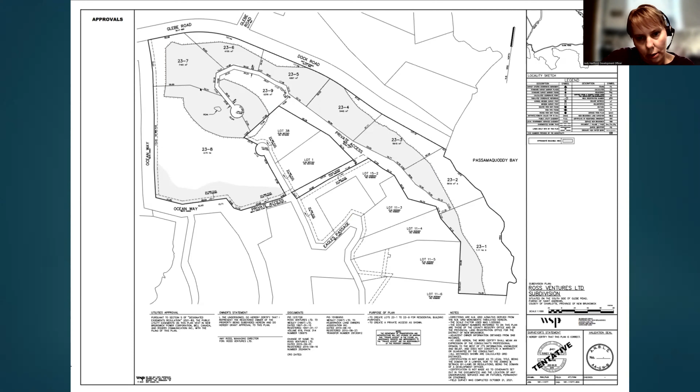The summary of the application is creation of a Class 1 private access for the development of land. This is the subdivision plan here. You'll see Ocean Way comes off of Glebe Road, and this would be one of the lots they were wanting to create, and a new access coming up through, and a private access going up to accommodate these lots along here, and then another small private access coming to a cul-de-sac to accommodate the lots up above here.

So the background: the proposal is for 9 residential lots in Chamcook, located off the Glebe Road. This development has been going on since about 2000 or 2001, and they have about 34 lots created. The property is zoned rural under the Chamcook Rural Plan, allowing for the proposed use of residential.

The property is subject to the Town of St. Andrews subdivision bylaw standards, so minimum width of 20 meters and a total length of cul-de-sac shall not exceed 365 meters from the point of access from the public maintained road. Another section of the bylaw does say a developer seeking a subdivision shall engage a professional engineer and submit engineer drawings regarding the design of the access and subdivision services, subject to the approval of a municipal engineer.

In the statement of public interest regulation, the policies relevant to this application are to avoid development and land use patterns that may cause environmental or health and safety issues, and respect development that occurs in the community with no existing public infrastructure services, favoring development in locations with previously constructed and actively maintained roads.

Promote land use and development that are not expected to increase the impacts of safety on costs associated with flooding and natural hazards. And lastly, promote land use and development that incorporate mitigation measures with respect to flooding and natural hazards, or that are appropriate for areas subject to natural hazards.

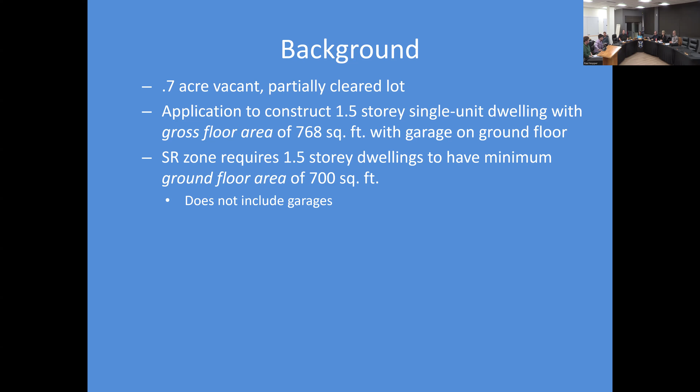But that does not include garages, so when you calculate ground floor area, you have to exclude the garage. Essentially this is considered a 0 ground floor area dwelling because the entirety of the ground floor is proposed to be a garage. So that is the variance request: a 0 square foot ground floor area. It sounds a little weird when you say it that way because it's not floating in air, but it's just a technicality in how we calculate ground floor area.

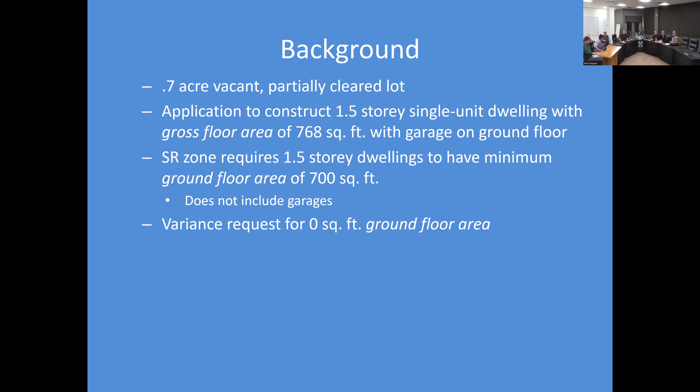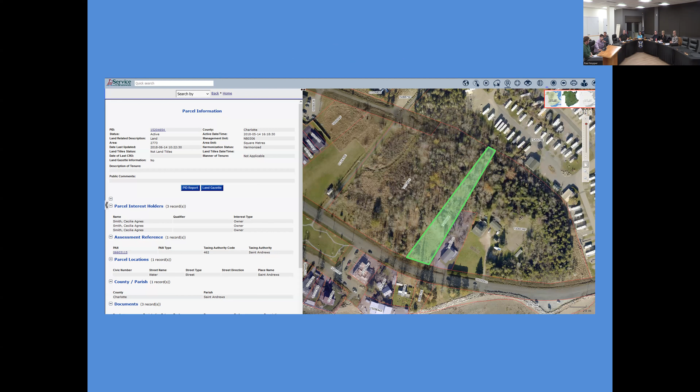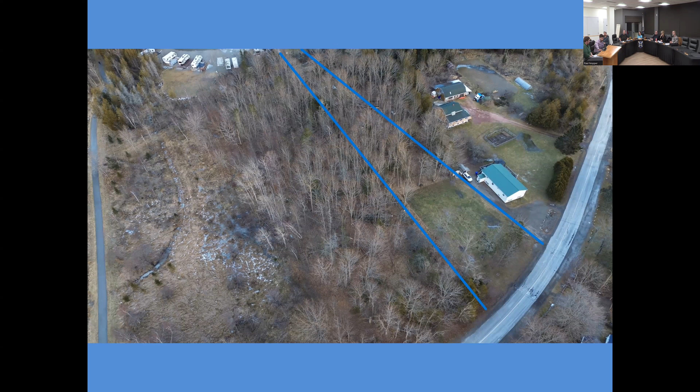So that's the lot. It's a pie-shaped lot there, right near the point. Again, this lot has been serviced for some time. It was subdivided several years ago with some intent from the owners to develop there in the future. This is an aerial photo taken with a drone, so you can see the lot lines and the partially cleared front, and they're going to show how they intend to develop.

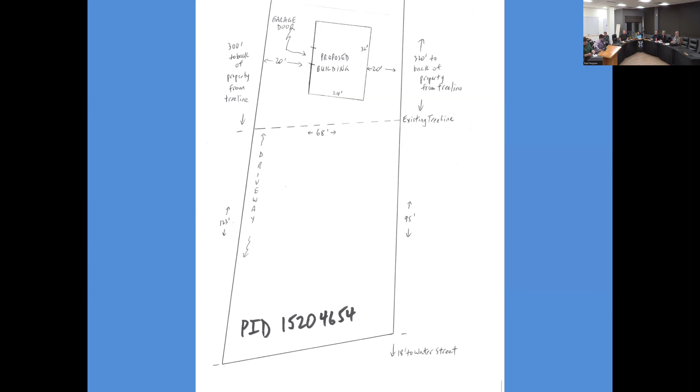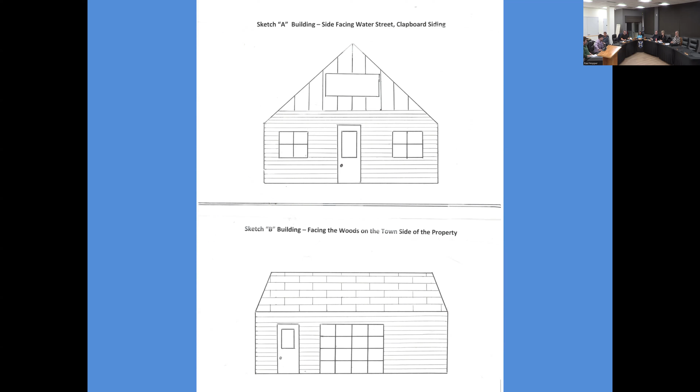So the top is the view of the proposed dwelling from the street, and the side, this would be the side facing away from the neighbor, more towards the trail, and that's where the garage entrance would be. So the proposal would have an appearance compatible with a residential character, with the small dwelling facing the street. That's an example of such a dwelling, that sort of A-frame style.

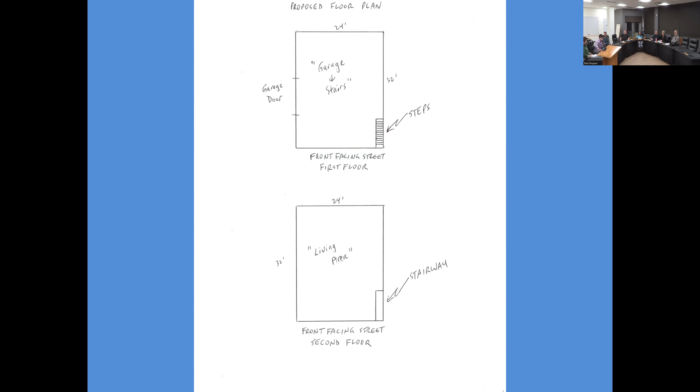So again, the garage encompasses the entirety of the ground floor, so zero gross floor area on the ground floor, and the living area is above, accessed by the interior stairway.

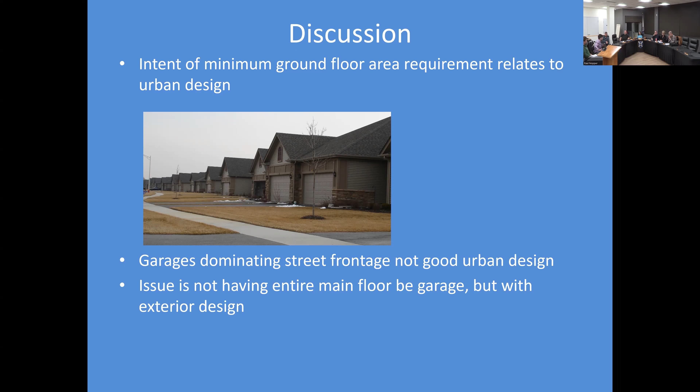Now, in terms of design, the intent is to make sure there's not a predominance of a garage facing the street. It's not a good design principle to have garages dominating your streetscape. So in order for this to be compatible with the intent of zoning, it should be required that they maintain pedestrian access into the garage and have that face the street as opposed to the garage, preventing the appearance of just a standalone garage in a lot. This would have a dwelling unit in it, it's not just a standalone garage, but you don't want the appearance of one, which would not be permitted in that zone.

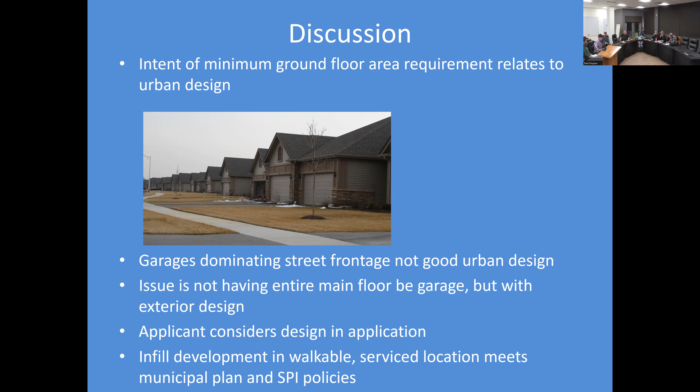So again, the applicant's considering this with their proposal for the front of the building. And in terms of overall planning policy, infill development in walkable, serviced locations is to be promoted. This is an infill location, serviced, close to downtown, right beside the trail, so it ticks a lot of boxes for development that should be promoted. There was a neighbor notice, and no comments were received at the time the report was given.

So what staff's recommending to the PAC is that they approve the variance subject to 3 conditions: 1, that any garage doors do not face Water Street; 2, that a main entrance/door at pedestrian scale faces Water Street; and 3, that the property is developed in general conformity with the attached project description.

The options for PAC include: a motion to approve the variance and conditions based on staff's recommendation; 2, a motion to approve the variance with modified conditions; 3, a motion to reject the variance request; or 4, a motion to table this application for further specified information. So that concludes the report.

Appreciate that. Does the committee have any questions for the planner?

Yes. I guess first question, are the stairs external or internal? The stairs are internal in this proposal.

Okay, perfect. The only thing I have a question about is recommendation number 2, that a main entrance door at pedestrian scale faces Water Street. That could end up having a facade of just a door and nothing else. I know the elevation they've shown has some windows and more articulation. I think that would be important to have. Kudos to having a design like this, I think it's appropriate, but we need to make sure that facade reads as the front of a house.

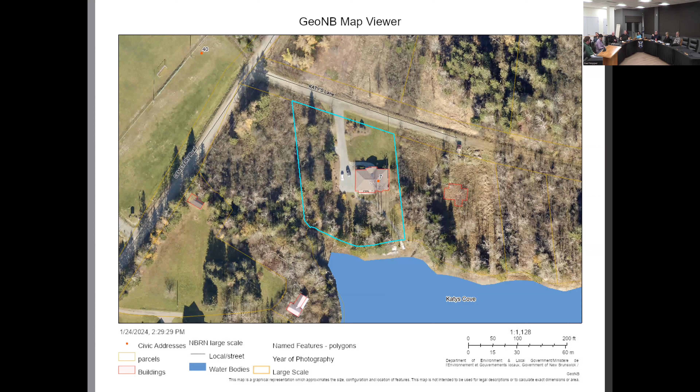The applicant believed that their property line extended to the pavement of the road, which is not true. They were looking at an old survey plan, a subdivision plan registered on the title, and did some measurements themselves without contacting a surveyor, ending up encroaching significantly into the municipal right-of-way.

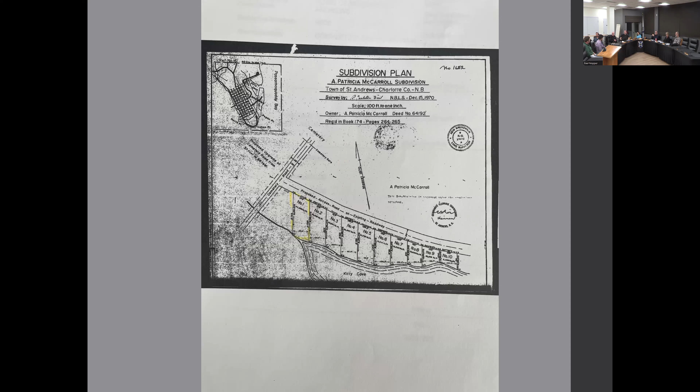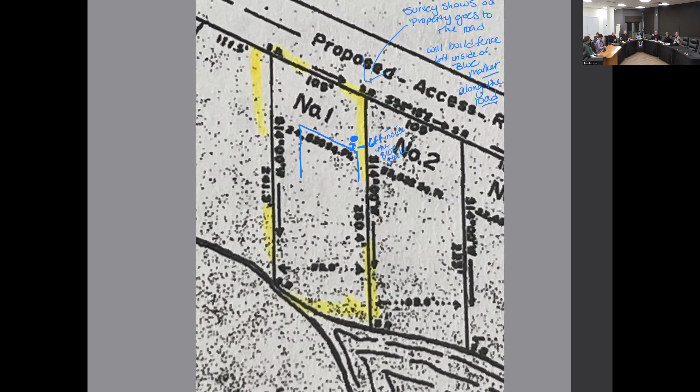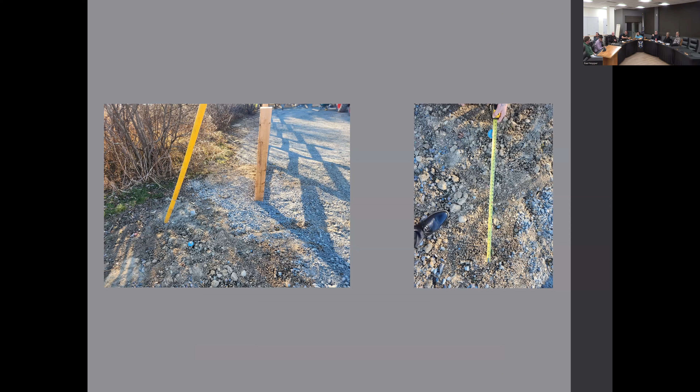You can see here where they're set back at least 1 meter from the front property line. That blue stake shows where the corner of the fence would lie and where they'd be located relative to their side lot line. This would be the front and side lot line, just showing the measurement there.

They actually have more than 2 feet. I measured it and did the conversion to centimeters—they had 90 centimeters when I measured it, to the side lot line.

We consulted town staff about this because it was an enforcement file initially. We talked about the encroachment and had concerns, as did town staff, and that was subsequently brought to council. Council confirmed they would not approve an encroachment of that magnitude, so it was deemed a non-starter, and that's where they removed the fence from the front yard.

Mail was sent to properties within 100 meters of the subject lot, and there was only one letter received, in support of the application.

The legal authority here is under the Community Planning Act, Section 53(3)C, which allows a certain section of your bylaw where things can be done with terms and conditions. You can prohibit a development if compliance with terms and conditions cannot be reasonably expected—so you can impose a condition they're not going to be able to meet, and then add a condition saying this is prohibited therefore.